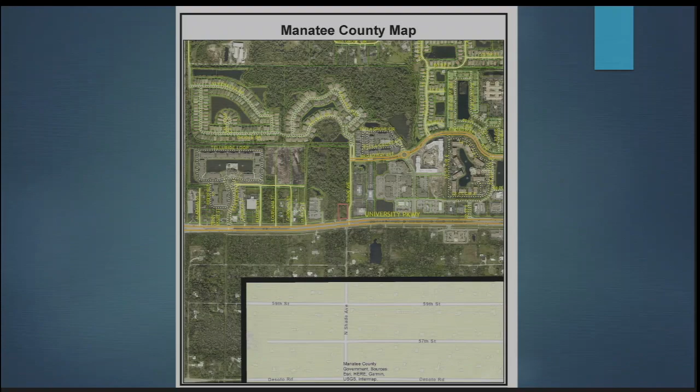This is the project site. It is approximately 0.82 acres located at the northwest corner of Shade and University Parkway. It's about a half-mile east of US 301. And this is the zoning map of the area.

You can see the site's already zoned, planned development commercial. So the request before you today is just for the preliminary site plan approval for the car wash. Car wash is a permitted use in the PDC zoning district.

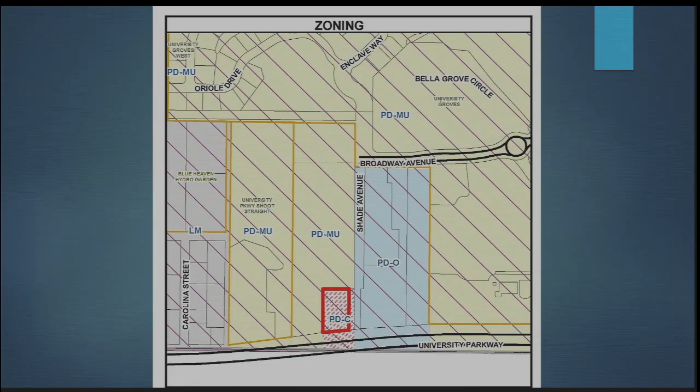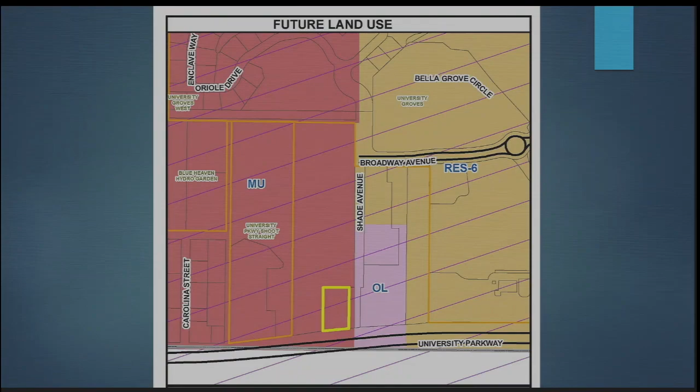And this is your future land use map. The site's designated mixed use, MU, which is one of the most intensive designations that you have in the county. The project is also located in the Southwest TIF District.

And here's your map of some of the surrounding developments. You can see there's a good mix of uses in this area. The project is completely surrounded by the Village at Sarasota multifamily project that was approved a few months ago.

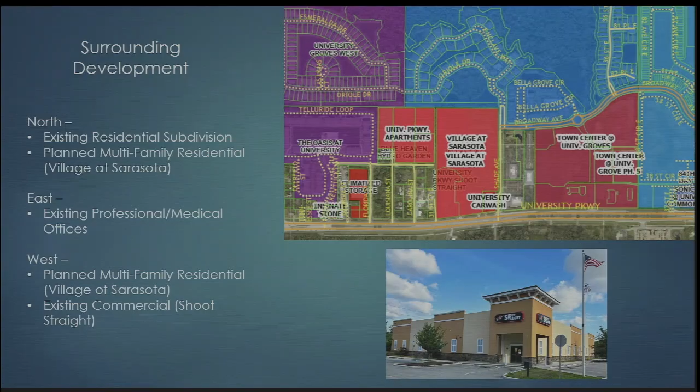This shows the site plan that was previously approved for this site. This is a drive-through bank that was approved in 2007 but never constructed, and that site plan has expired now.

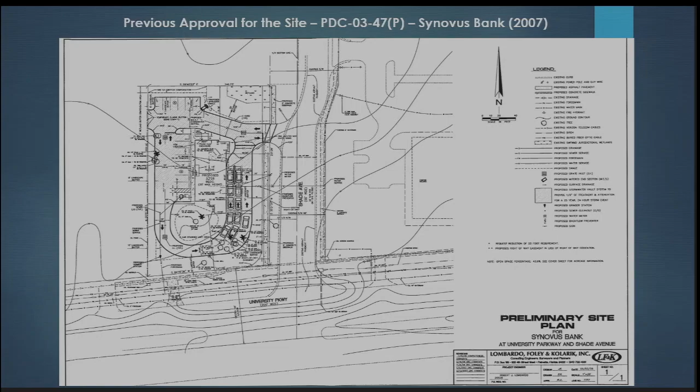Here's a colored version of the site plan that's proposed today. You can see the vehicles are going to enter off of Shade, go through the kiosk, into the tunnel, and then there are two rows of vacuum stations with shade covers when you come out.

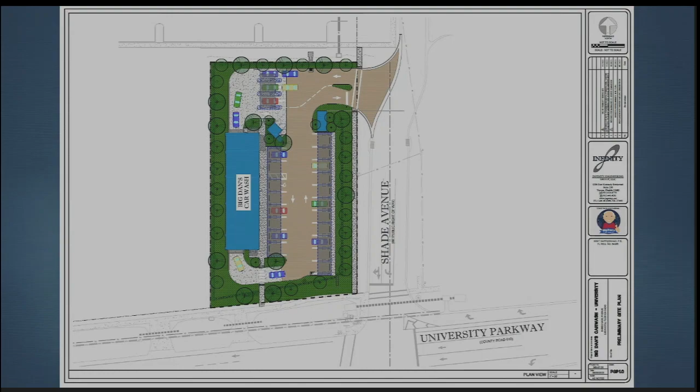There are a few specific approvals being requested for this project, so I want to give a little background. First, this is a small site located in the entranceway, which triggers a number of additional requirements, including enhanced buffering. This project will meet the enhanced buffering requirements even where the widths of the buffers are being requested for reduction.

At the time we applied, the Village at Sarasota project that I referenced before, which surrounds the site, had not been submitted. So the original design did not have to account for the additional requirements related to being adjacent to residential. We came in with one site plan, then midway through, Village at Sarasota passed us, and we had to go back and account for the fact that we had residential adjacent to the site.

The owner of that project, which entitled Village at Sarasota, did submit a letter of support for this project. They were aware of it and accounted for it when designing their apartment project. So the first batch of specific approvals I'm going to run through today are all driven by the fact that this was approved for residential before this project got through the process.

Drive-through stacking areas are required to be set back 30 feet from residential zoning. We have 6.5 feet to the north and 15 feet to the west. However, the area to the north of the project is the parking area for Village at Sarasota, not residential units.

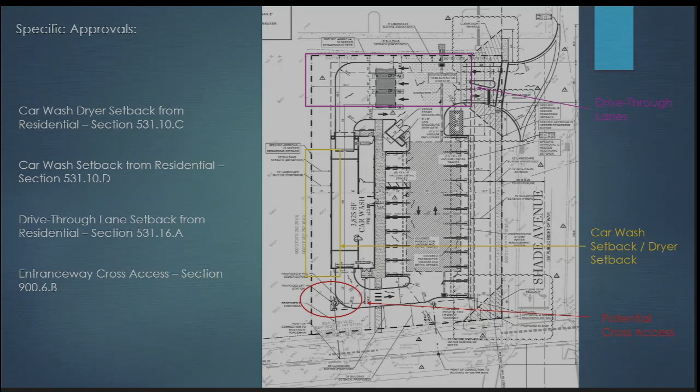On the west, car wash structures are required to be set back 35 feet from residential uses, and drying areas are required to be set back 50 feet. Our tunnel building is set back 15 feet, but the dryer is on the southernmost opening, so it's all oriented towards University. Also, the tunnel is adjacent to the clubhouse and amenity center for the Village of Sarasota, not the residential buildings. We also increased the buffer width on the west side from 10 feet to 15 feet.

The last red circle at the bottom shows the original cross-access location for this project. However, the Village of Sarasota did not connect to the proposed cross-access, so there's no reason for us to show it on this site.

The next batch of specific approvals relate to the design considerations of the project, specifically the shade covers and the vacuum enclosure for the vacuum station. We think these are superior design features for the project, but when you add them, you have to comply with the setback requirements for structures, and that's why you see these specific approval requests.

The vacuum enclosure is set back 20 feet from Shade, where a 30-foot setback is required from Shade and from University. In the southeast corner, for the shade structure over the vacuum space, we're providing a 15-foot setback from Shade and 20 feet from University.

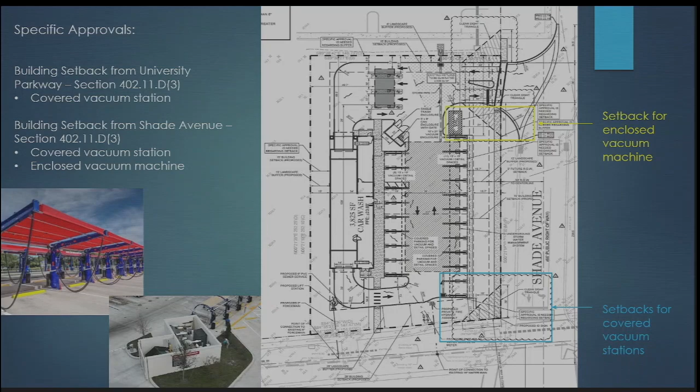These are the last specific approvals. The access point is required to be pushed as far from University Parkway as possible, which was required by the county during our review process, and that's why you see the reduced buffer width to the north, because that is as far as the access could be pushed. The buffer on Shade was reduced from 20 feet to 12 feet, but there's also a 9-foot right-of-way reservation in that area, so there is additional separation there.

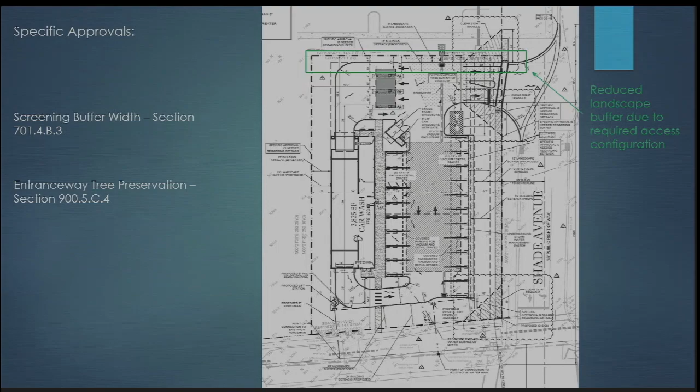Lastly, we are requesting specific approval from the entranceway requirement to preserve 75% of trees exceeding 24-inch DBH on site. There are only two trees on the site that meet that requirement, and one of them is right in the middle of the site, so we won't be able to meet it. But it's possible that the second tree, on the western border, may be preserved. We'll find out when we get into construction.

Staff is supporting all these requests, and we appreciate their work on this project. We also received a recommendation of approval, 6 to 1, by the Planning Commission, and we are respectfully requesting your approval today. Happy to answer any questions.

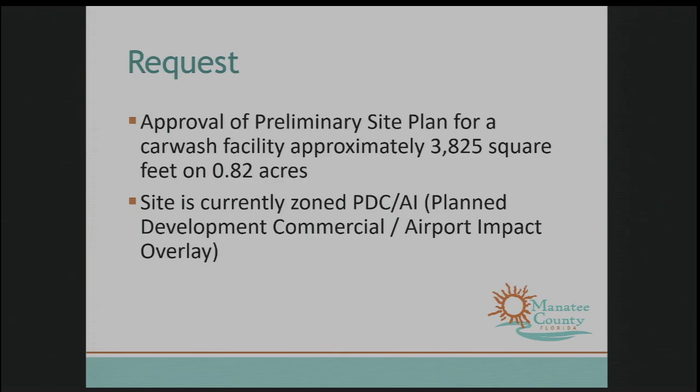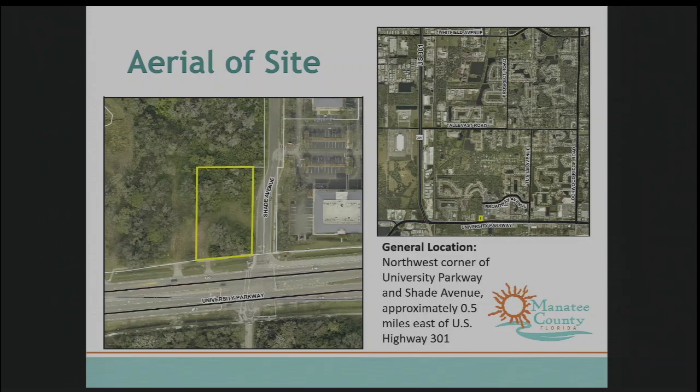We're going to go fast through the same part of the information that the applicant provided. The proposal is for 3,800 square feet of car wash facility on 0.82 acres, and the site is already zoned PDC and within the airport overlay. As you see, it's located in the northwest corner of University Parkway and Shade, and is half a mile from the US 301 highway.

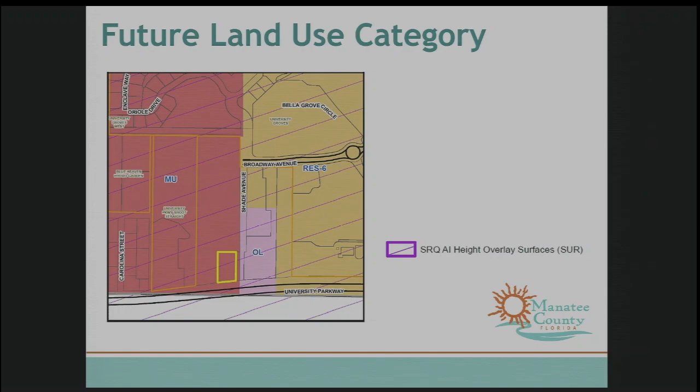As shown, it has a future land use of MU, which is the most intensive use future land use category, and with the airport overlay, it's on PDC. It was zoned like the applicant stated in 2004, and after in 2007 was approved for a bank with a drive-through that expired.

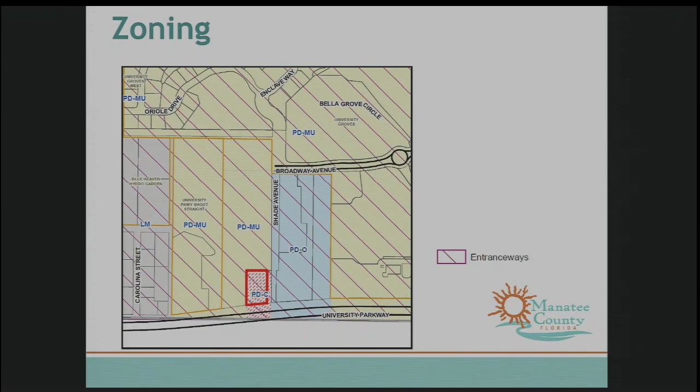It's surrounded by a multifamily approved project that is not built yet to the north and to the west, and across the street is an office complex. These are the surrounding uses. The applicant went through the site plan, and as he says, there's only one access on Shade, located in the northern portion of the site to provide more separation from University.

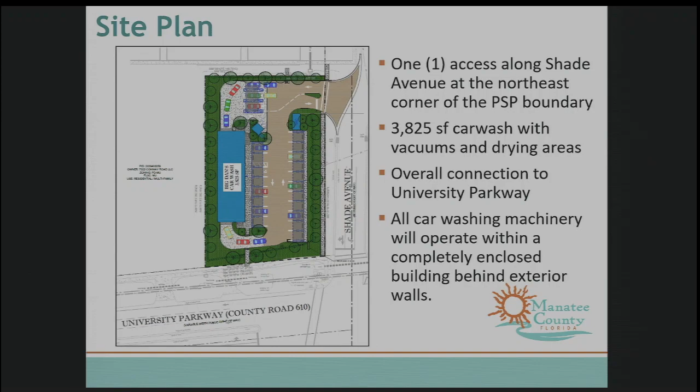The location provides the connection with University Parkway, and all the car washing machinery will operate completely closed and separated from the residential units adjacent.

The applicant went through the specific approvals, and I'd like to point out that at the time of the original application, the applicant provided a GDP, and given the amount of specific approvals, staff requested a preliminary site plan in order to properly analyze how the specific approvals would be implemented.

They have a specific approval to the north to reduce the buffer from 10 feet to 6 feet, given the separation they have to have with the access. That's number one, to the north, the property boundary.

After that, they have specific approvals related to the PDC zoning that relate to the buffer they have to have along thoroughfares. To the south, along University, they're proposing to reduce from 30 feet to 20 feet, and along Shade from 30 feet to 15 feet.

It's important to note that Shade is subject to many improvements in the future, and that triggers a special buffer requirement in that area.

After that, on the west side, they have specific criteria they have to comply with for the car wash use. Another important thing to note is that since the beginning of the process with this car wash, additional regulations were approved during the process.

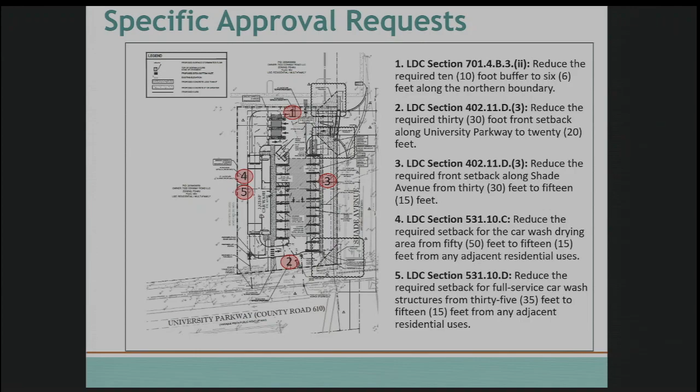Before, the regulation related to a car wash adjacent to residential units wasn't in the Land Development Code, and they were posted after this case came in. Also, the parcel to the west wasn't a residential project. They have a specific approval related to the regulation for the car wash to the north, with the separation from the vehicular stacking area.

Also, they have a specific approval related to the entranceway that requires additional buffer for a commercial project in a regular PDC. They need only 10 feet.

With the entranceway, they need a 20 foot roadway buffer. They are complying with the buffer to the south, and along Shade they are reducing to 12 feet. Also, the regulation related to the caliber and preservation of the trees.

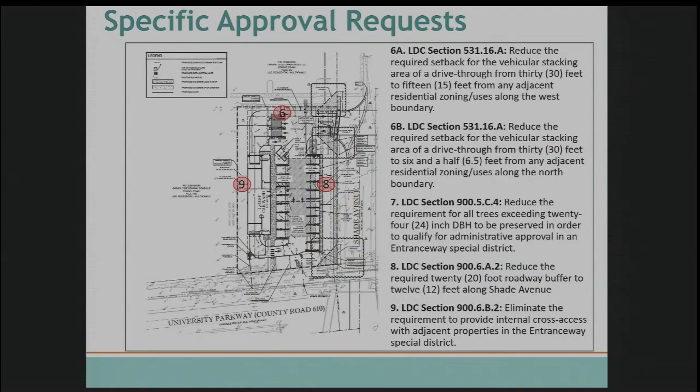Staff is in support of the specific approvals, and we put together this slide that shows that to the north, the reduction of the buffer is more intense.

There is a separation between the property line and the first building proposed in the Village of Sarasota of 150 feet, because the plan is providing for parking areas along the northern portion of the site.

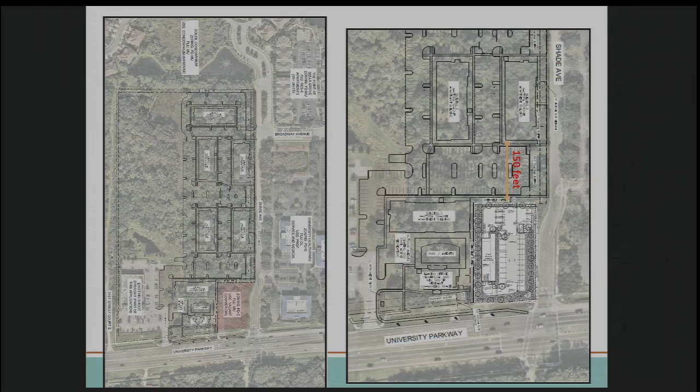Also, the enclosed building is located adjacent, as the applicant stated, to the amenity center, not to the residential building.

Staff is in support of the specific approvals, and if you have any specific questions, we're here to respond. Thank you. First on board is Commissioner Ballard.

So I think you've answered some of my questions with relation to all of the specific approvals. It sounds like staff is in support of the specific approvals for a couple of reasons. Number one, the car wash regulations were not in place at the time of the initial application. Is that part of the reason?

Yeah, part of the reason is that in between the process, we approved stricter regulations related to the car wash adjacent to residential.

Okay. And then another reason is that you're looking at the actual portion of the residential where people are residing, and it does meet that requirement. Is that correct?

Yeah, we were looking at the place where the real residential units are going to be located, not the accessory use for the residential complex.

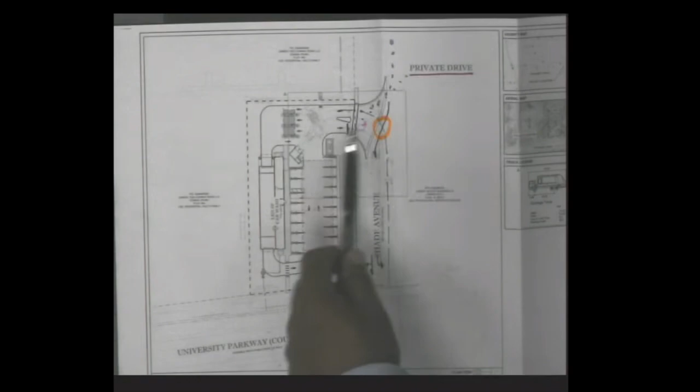Let me use the paper camera here to explain something regarding this access. Our first concern is essentially these conflict points between the northbound left and the southbound through movement, shown here in orange. That is our first concern. We also have concerns with the southbound right, with the amount of cars that stay over there, and we don't have the lane. Another concern is the proximity with the other private driveway.

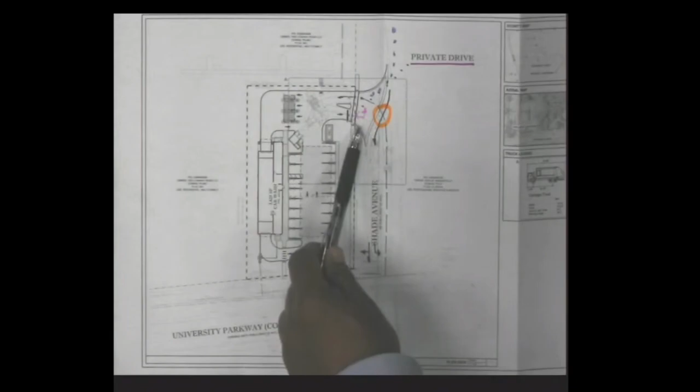It means we have conflict points on this area on the access, but at the same time we also have conflict points on the adjacent driveway, and both accesses are very close. We need to think how to solve this problem. And it's very probable that the left-turn movement should be prohibited in order to avoid another conflict at this intersection.

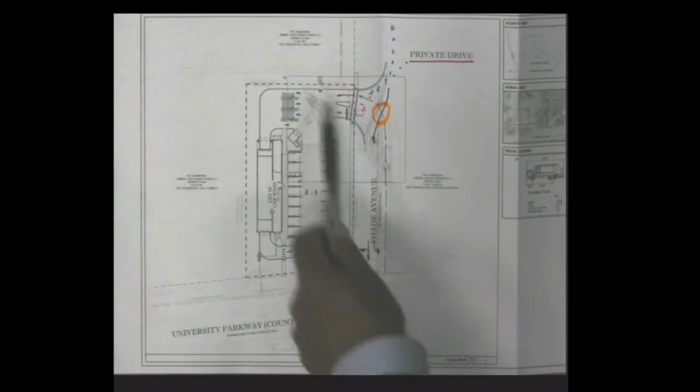Another topic we haven't spoken about yet is here -- what happens if someone gets it wrong, meaning instead of getting through the booth, they turn left? How can they return? We need to evaluate also the internal circulation, but these items need to be analyzed at the time of the FSP.

I understand that, but you're asking us to make an approval now, not at FSP. So that's my concern, is that we see what happens at other places. We've already experienced these other type situations where we're 250 feet from University to the entrance here, which is how many cars? 16, 18 cars. So when they're all sitting there trying to turn right onto University, and we have no right-hand turn lane, and we have no ability to have an acceleration lane where they can turn in and go onto University and wait and move into traffic, that's a big concern of mine.

The stacking that's going to go on there is going to be a disaster. And then we're gonna hear about it later on after the final site plan's been approved by you guys, when we never get to see it again. So that's my big concern. All right, that's all I have.

Commissioner Kruse? Yeah, I'm going the same way as the chairman. My concern is I don't see how the cars are coming in and out. I don't see how the stacking works. All I keep hearing here is we want to put a car wash here and we have to do this because it doesn't work, or have to do this because there's 9 different requests. Not to mention you're saying, well, we got to figure out.

I thought that's what we were here for. This isn't really a rezone. Nobody's arguing whether or not you could hypothetically put a car wash here. You could put a car wash here. It's probably going to be very successful as a car wash here. There's a lot of residents around.

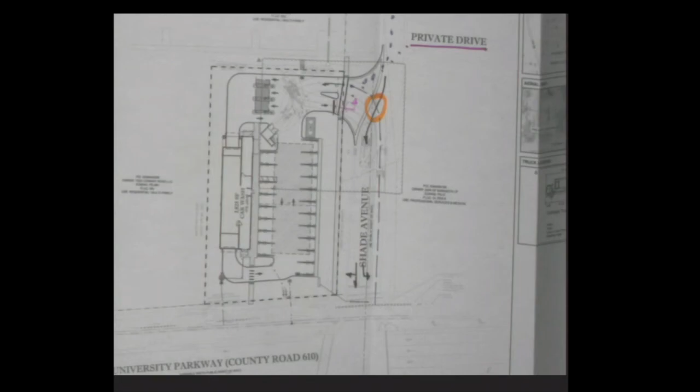If we're looking at it, we have two lanes coming in. Is there a way, just for design, have any of these things been discussed? I'm not an expert at this, but if we could get two full lanes coming in and one coming out, it would certainly help with the pinch. Does that make sense? We have two lanes, we have one lane basically coming in, we've got a little island in the middle, and we've got to try and get the traffic out.

That vacuum thing is facing north-south. I'm wondering if we could just turn it, we could end up with an extra lane for ingress-egress into the car wash. Does anybody see what I'm talking about? No? We're worried about trying to get in and out - you see at the top? That's why I want you to zoom in so they can see it.

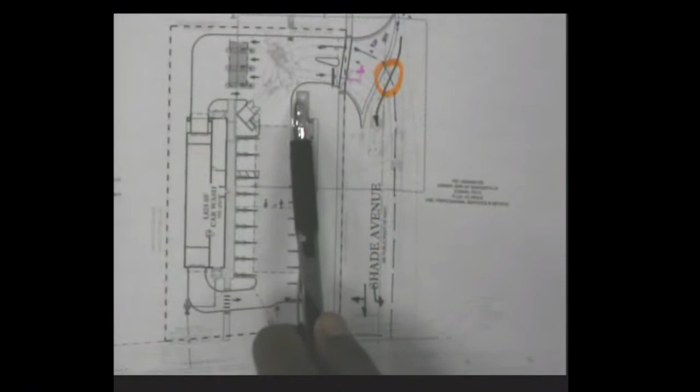That's just the drain. According to the drawing, it looks like one lane coming in, one lane going out - is that correct? Yes. So what I'm asking, and this could be a later thing - do you see where the huge vacuum machine is facing north-south, right there, the box at the top? Could we create more room if we turned that horizontal? We'd end up with another lane of access. So just to the client, perhaps that would alleviate some challenges with the coming and going, if that's a possibility.

I'm a member at the Dan's up on 64 too, so I love it, you guys can move some cars, absolutely, it's a very efficient design. The thing with the one on 64 is we've got the setbacks on the south side of this one and on the east side - that's where all the traffic gets stacked on the one on 64.

That would be probably something you discuss with the applicant. Denise Greer for staff, can I interject? That will cause another conflict point. We typically like to have one access coming in, especially coming off of a two-lane road, if I'm correct, but that would cause another conflict point.

So you don't want to have two coming in? We don't want to have two coming in, but they could widen as soon as one comes in, which they've done - you can come over and get in one of the lanes. So it wouldn't be practical for us to have two lanes coming in to relieve that then? Correct, I think that would create another conflict point, another potential place for an accident, because somebody from the north could come in, somebody from the south, and they don't quite stay in their lane.

Okay, there's a question. Was it? That's it. Yeah. Mr. Satcher. Thank you, Mr. Chair.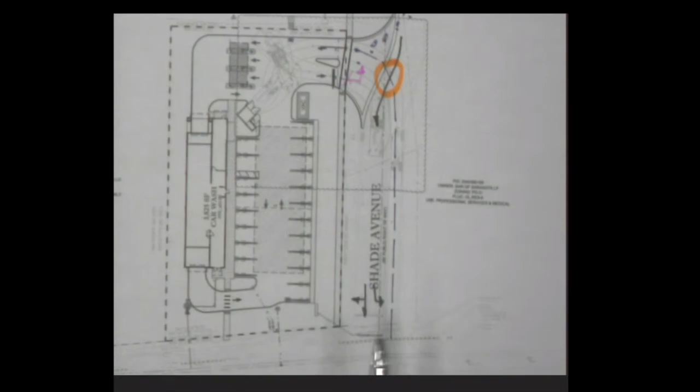For Take 5, that is their entrance, that's how they avoid stacking - you're pulled in on the north side of it. So this is very similar, and similar in size, a little bit bigger. I looked at it, but it has a pond or flooding area, so I think by the time you took that out of the equation, they're really similar lots. But they send people south and then around, and the car wash starts - if we were to put them on top of each other, the southwest corner of this would be where the car would initially go into to get washed.

Could we solve everybody's problem if we got rid of the requirements for how far they have to be from the road? Because to the east, that's not a residence, I don't believe - it's a doctor's office with plenty of parking. I don't think you're going to get any complaints there.

Is that possible? Is that an option for us that would help with the stacking issue?

Looking at the Take 5 on an aerial right now, the difference between this one and the Take 5 is if you look at the plan before you, Take 5 has their intake lanes where Shade Avenue is, directly adjacent to where the vacuums are. So they have that whole length of the vacuum to take in, then they've got 3 lanes, and then they go into the car wash. Their site is physically bigger.

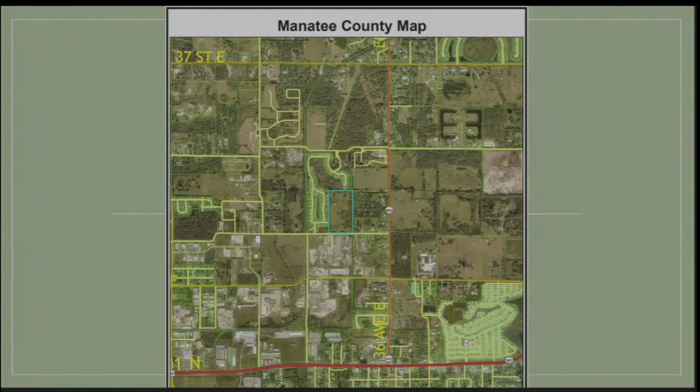Again, this is a request to go from Res 6 to Res 9. The project site is just over 21 acres in size. This is the location of the project, and this is a closer aerial.

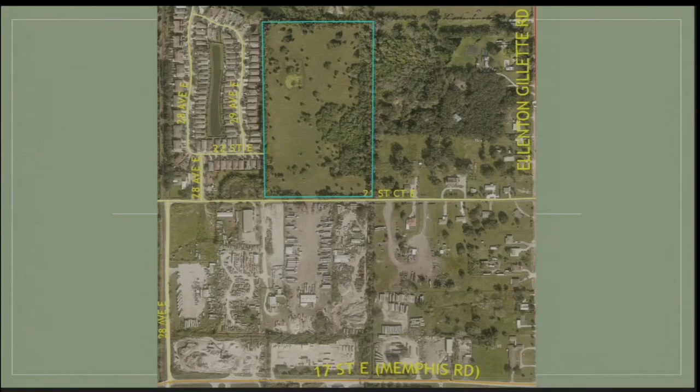You can see this area has an interesting mix of uses. You have industrial uses to the south, just across 21st Street Court East. On your future land use map, the site is Res 6, and to the south you have a mixture of light industrial, heavy industrial, and the Res 9 category that we're asking to go to today.

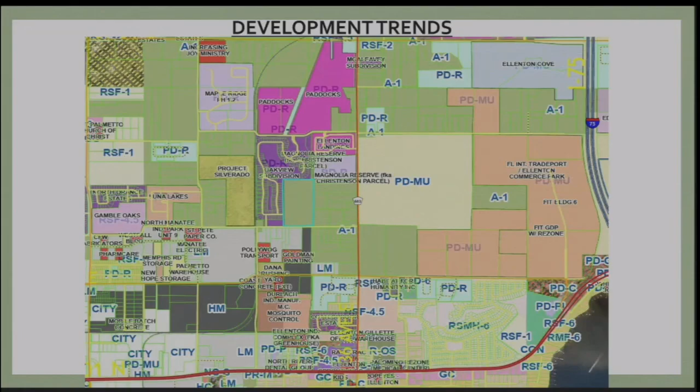This site is located in the urban core. It's within the urban infill and redevelopment area, within an activity node. It's an area where the county has infrastructure and employment opportunities and has goals and policies that encourage infill and redevelopment. What you're looking for in this project is right in line with those goals.

And now to the rezone. Again, this is a rezone from A1 to PDR with a general development plan for a maximum of 191 residential units. This is the zoning map of the area, and you can see there are several planned development projects in the vicinity of this site.

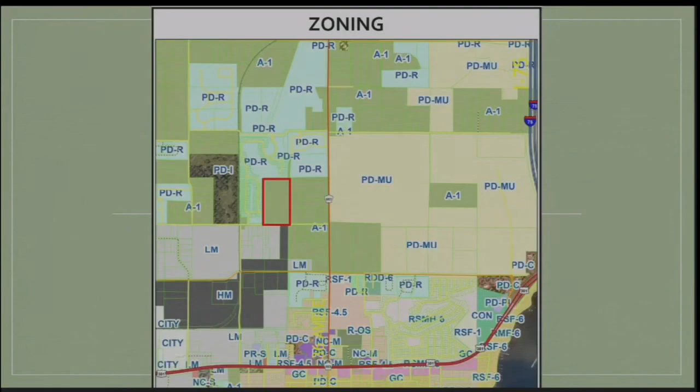This is the general development plan. There is a large wetland and a ditch system that runs down the eastern boundary of the project. That is not being impacted. It's providing the 30-foot buffer, so you're going to have a significant separation between the residential uses to the east. The rest of the project is meeting the required buffers, with a 15-foot perimeter buffer and a 20-foot roadway buffer.

This is a GDP that's intended to provide some flexibility. So it could be single-family detached, single-family attached, semi-detached, or multifamily, or a combination thereof, with a maximum height of 3 stories.

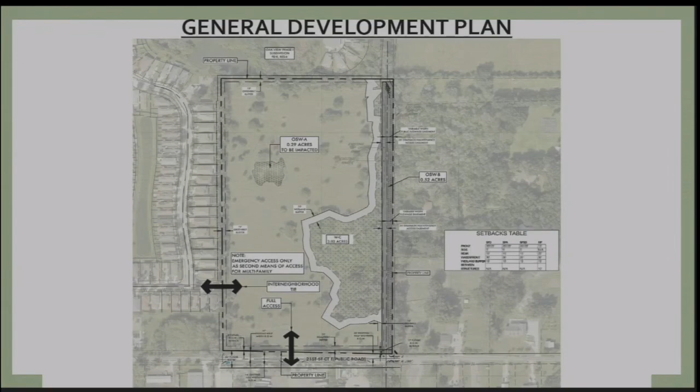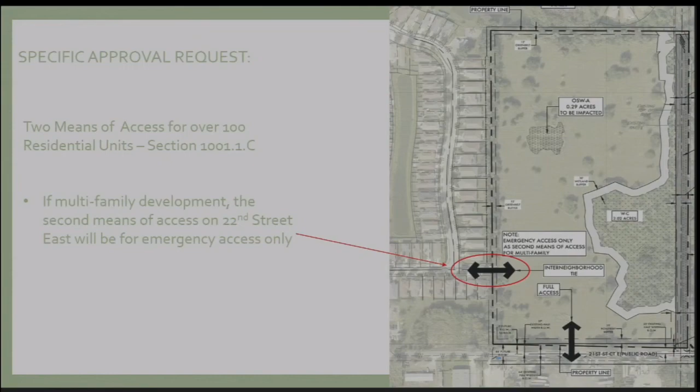There's one specific approval request on this one, relating to the inter-neighborhood tie. This came out of our neighborhood workshop. There were a couple of folks in the residential subdivision to the west who asked if the site were developed as multifamily, that we not make that a full connection for the inter-neighborhood access. So we have proffered this specific approval to accommodate that request, and we have no objection to doing it. It would only be if the site were developed as multifamily that the access point would become emergency access only.

This project did receive a unanimous recommendation of approval from the Planning Commission, and we are respectfully requesting your approval. Happy to answer any questions.

Thank you very much. Commissioner Kruse: have you looked at using any level of our affordable housing incentive on this? This seems like not only the right place for it, but in all honesty you're probably not charging more rent than what that 120% would be anyway. You just get free density. We don't have to upzone it from R6 to R9 - you just automatically get even more than R9. Right.

Probably for charging the same rent you're going to charge across from whatever that junkyard is to the south of it. So you're basically just getting free density.

Yeah, that was something we did look at. The client, especially at the beginning of this, there weren't as many. We're seeing a ton of affordable action right now, which is great, but they weren't seeing that in their market, so we didn't put it in here as part of the request. Obviously, if somebody wanted to do affordable, this does set them up to come back and ask for the additional units if they want to do it. It'd be a relatively simple process, but no, it's not part of the request.

Okay, just curious. I mean, I have absolutely no problem with this, but I was curious if they were planning on it. Thank you, sir.

Commissioner Van Ostenbridge: Thank you, Mr. Chair. Neighborhood connectivity is the root of my question. So, of course, we are big proponents of neighborhood connectivity. We want to keep cars from going out onto the main road. I understand the neighborhood adjacent to you's concerns. So my question then would be, could we, or maybe you're proposing this anyway, get into the details.

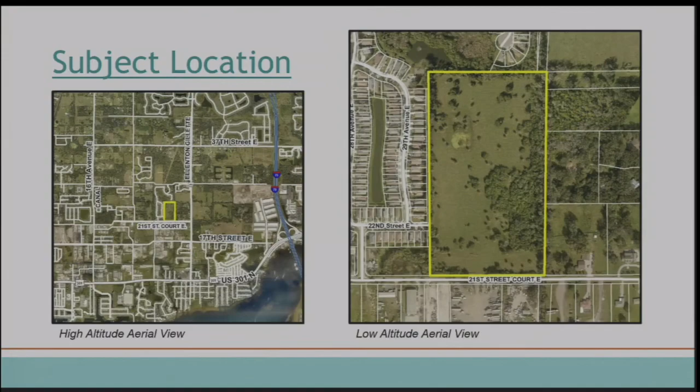We've got the subject location west of I-75, north of the Manatee River, accessible via 21st Street Court East. The one thing he did not mention is it's within an activity node, and I'll note that later, at Buchanan, Ellenton Gillette, and 21st Street Court East. As mentioned, they're requesting to go from Res 6 to Res 9. You can see surrounding future land use categories there.

The Res 6 potentially allows up to 127 dwelling units, with a density bonus, which was just discussed, they could go up to 255 units. They're requesting to go to 191 maximum under the Res 9. With the density bonus, that could potentially allow up to 425 units. The difference here is high-density clustered residential versus currently medium-density clustered residential.

We talked about nearby projects. If you have any questions, I'd be happy to answer.

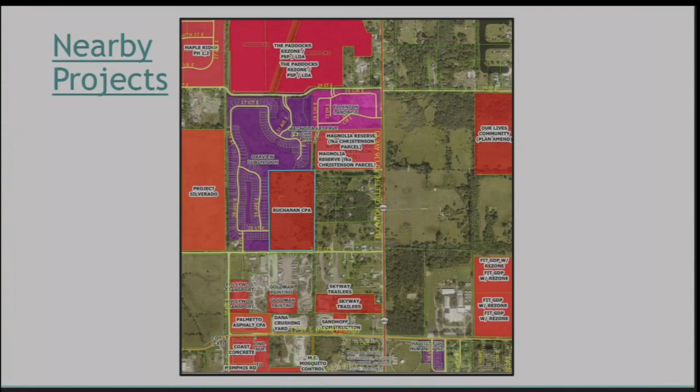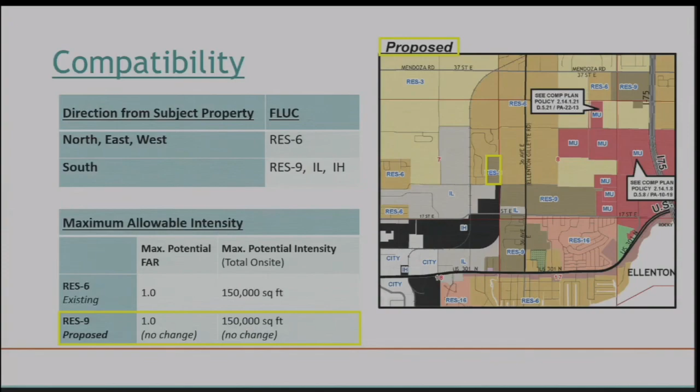Compatibility: surrounding land uses to the north of 21st Court East are Res 6, but to the south we have a mixture. We have a Res 9 to the southeast. We have IL and then a bit of IH. One thing at the bottom to note is that the 150,000 square foot potential commercial activity would not be increased. They can potentially do that now, and they could potentially do that same thing with the same maximum under the Res 9.

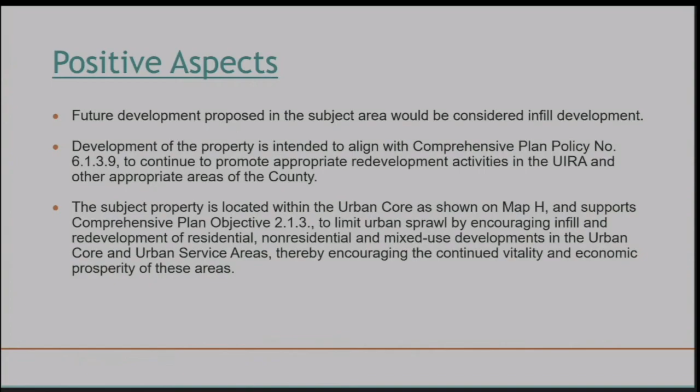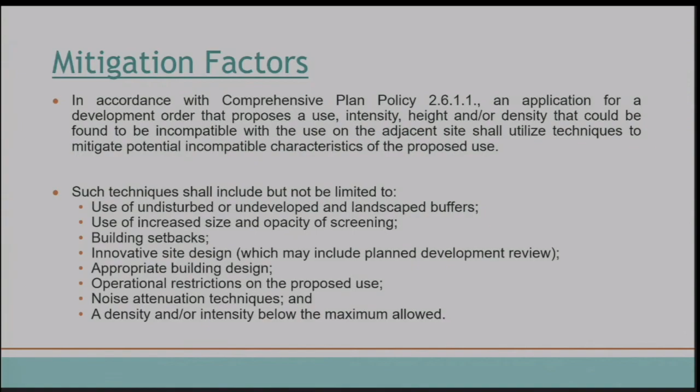Some of the positive aspects: it's located within the urban infill redevelopment area, which the county is incentivizing growth in. They partnered with the city of Palmetto a while back to transition this development area. It's also within the urban core, urban service areas, and west of the FDAB. Potential concerns really rely around the industrial uses to the south, and looking at mitigation factors is how we address those. They would have to comply with Plan Policy 2.6.1.1 related to any mitigation design requirements, and those often relate to potential change of uses next door.

In summary, it appears to comply with all comp plan and land development criteria.

Staff took this to the Planning Commission, and they provided the recommendation, and now we're requesting for the County Commission to vote. Happy to answer any questions if you have any.

Thank you, sir. Are there any questions of staff? Thank you very much.

At this time, I'd like to call up... Mr. Chair, excuse me, that was the comp plan staff presentation. Now there's the rezone. You want to do them both at the same time? That's what we're doing. Now we'll do the rezone. And just for clarification, so the no ex parte communication statement applies to both the comp plan? Yes.

She's keeping you straight. Hi, good morning. This is Laura Gonzalez with Development Services Department, and I have been sworn. I agree with the applicant's presentation, and I just want to highlight three comments based on the staff review and the analysis presented in the staff report.

First one is compatibility. I would like to show... okay, we have this one. This is the general development plan. So my first comment is related to compatibility. The proposed residential use is compatible with the residential uses to the north, east, and west.

The project includes a variety of dwelling types, so we can anticipate a difference in the development pattern, especially to the single-family residential units and larger lots to the east, and especially if the multifamily use is developed. To address these differences, as required by code, the project includes a 15-foot greenbelt buffer to separate the development from the adjacent neighborhoods to the north, east, and west. To the east, the wetland and the ditch that runs parallel to the eastern property lines provides additional separation from the residential uses in the A1 zoning district.

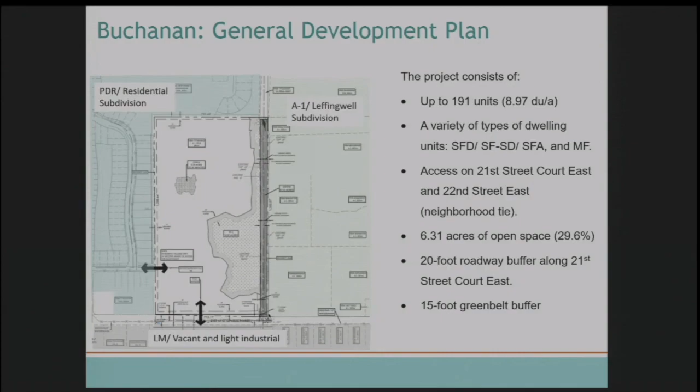My third comment is that the project is located in an area where services and utilities are in place or are planned to be developed to accommodate the development. Staff has evaluated the impact of the proposed density on the existing infrastructure and services, and has determined that they can support the new numbers of residential units. With the proposed stipulations and related specific approval, staff finds the request to be consistent with the policies of the comprehensive plan and the applicable requirements of the Land Development Code, subject to the comprehensive plan amendment that my colleague Dan has presented. If it is approved by the board, then the project will comply also with the policies of the comprehensive plan. This is my presentation, if you have any questions.

Thank you. Is there any questions from the board for staff? Thank you very much.

What we'll do now is we'll open it up for public comment. If there's anyone in the audience who'd like to come and speak on either one of these items, please come forward. Seeing none, we'll go ahead and close public comment.

Is there any staff closing comments? Is there any applicant, anything? All right, we'll move to Commissioner Kruse on the board.

Commissioner Kruse: I'm going to say if we're going into deliberation. Look, this is an infill location where it needs to be. It's close to employment centers. You've got the Benderson industrial area right there. This is a great location for this. I think it does lend itself to the additional density because I believe the rents lend themselves to the additional density. I have no problem with this. I think this is a good use of this land, and I think this is going to be successful. And again, it's putting growth where growth should be. So I like this project.